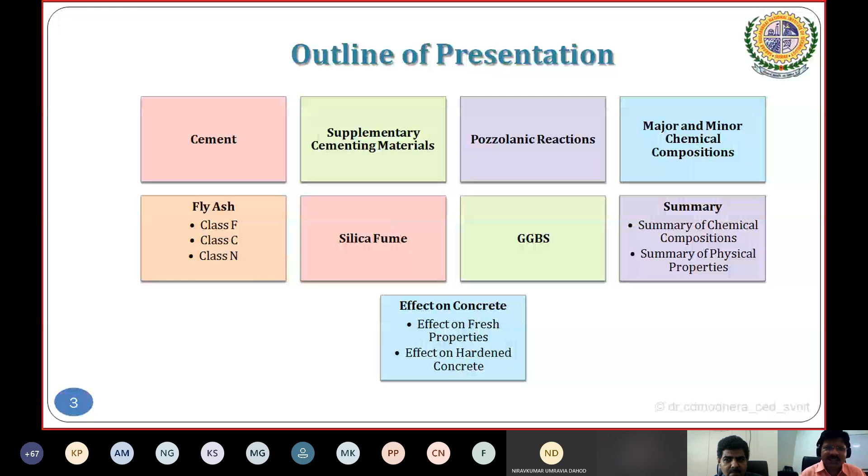I already spoke a few sentences about the outline of the presentation, so I will skip this slide. You can say the available oxides in cement, basically lime and silica.

Can you see this? You can interrupt sometime because I do not know why it is not coming. Now it is coming. Yes sir, okay, it is visible, thank you very much.

So you can say basic oxides in cement, because when we are talking about cementitious material, supplementary cementitious material, we should know the basic components of the cement itself. So I want to explain the chemicals involved in cement powder, mainly calcium oxide, SiO2, Al2O3, and so on.

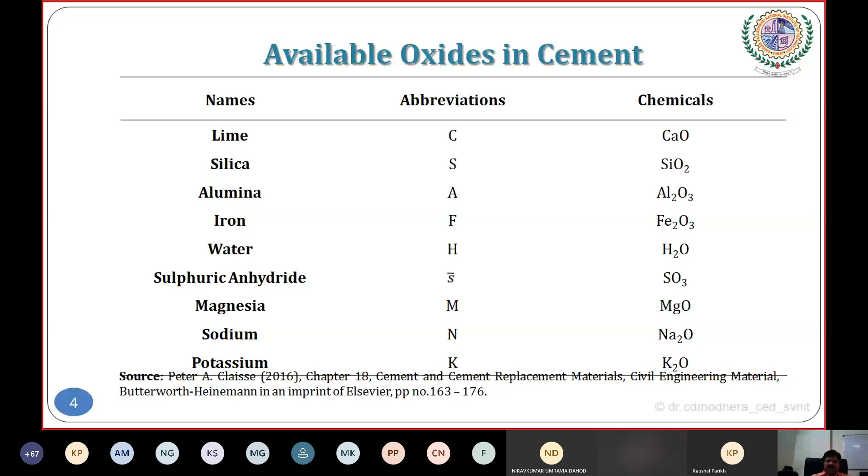Basically, cement compounds refer to four basic main compounds: tricalcium silicate, dicalcium silicate, tricalcium aluminate, and tetracalcium aluminoferrite. This is not hypothetical, it was seen, the range is defined, and sometimes for OPC it is 55, 16, 11, 9 respectively for the various compounds.

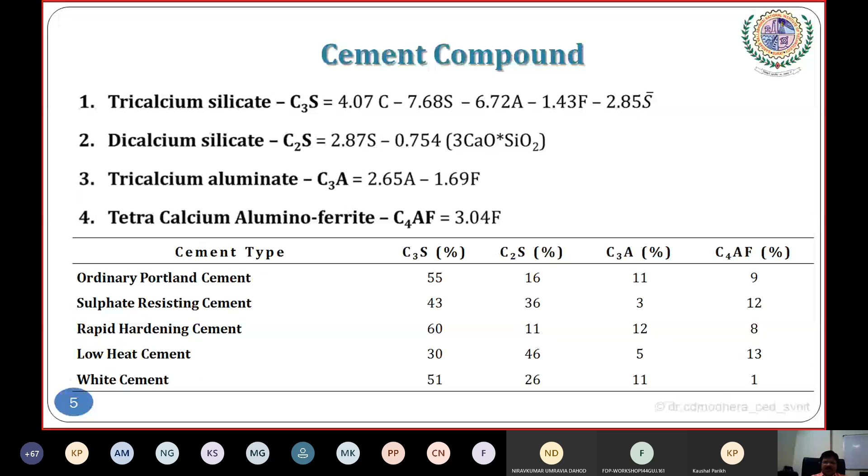Similarly, SRC cement is very important, as the seashore industry or maritime board usually refers to SRC cement for constructing jetty or similar structures. RHC means rapid hardening cement, also having respective compounds, low heat cement and white cement. As studied during BTech or MTech or in the field, many kinds of cement exist, but here I have written only 4 or 5, just to show what compounds exist.

Mainly, in short form: tricalcium silicate, dicalcium silicate, tricalcium aluminate, and tetracalcium aluminoferrite. These are, you can say, the time of 80% hydration when it will be completed, based on the literature itself.

What is written, Peter A. Claisse, as I already spoke last time, is taken from the American Concrete Institute and one of the textbooks at USA. So 10 days is required for completion of 80% hydration of the C3S component.

Similarly, C2S usually requires 100 days. So the second column indicates the number of days required to complete 80% hydration, and heat of hydration in joules per gram can be found out. C3S induces around 500, C2S around 250, and likewise. So this is just for the sake of information, heat of hydration and the hydration process are the main issues.

So what are each of the three or four components responsible for? We can say C3S is mainly responsible for early age strength. C2S is responsible for long-term strength, and C3A is just quick setting, nothing to do with hydration, but it sets, and then C3A reacts with sulfate resulting in sulfate attack on the concrete that causes it to deteriorate.

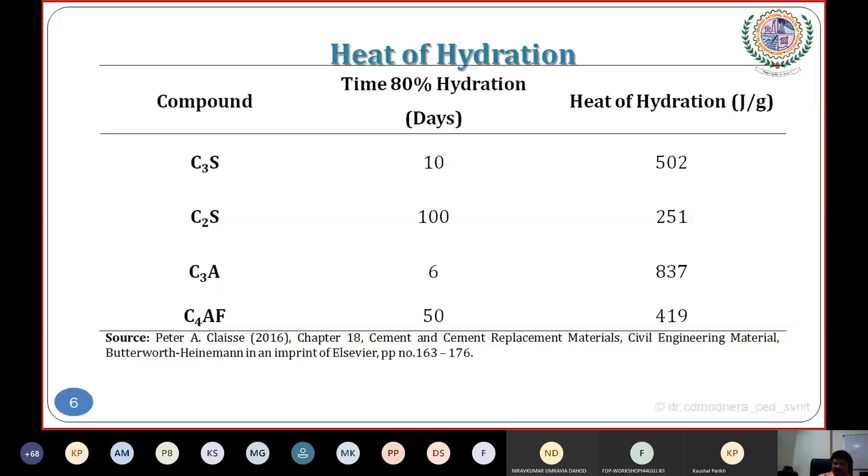In a broader sense, this diagram indicates condensed silica fume, PFA which is pulverized fly ash, GGBS, OPC, HAC. So I mean, how is it possible to replace cement with these?

That is the idea. Mainly natural pozzolana is very important, and I must emphasize, nowadays people are working with concrete and all doing their level best, but knowingly or unknowingly B.Tech students add something to concrete. We should think every time we are adding something to concrete and testing it. It is not scientifically correct, because when you are adding it and mixing it, hydration may or may not occur, and strength may or may not be there.

So basically, to add to cement, replacement may be 10%, 20%, 40%. You have to check the pozzolanic index first - that is the first test. I have seen many, even MTech and PhD thesis work, where I was involved in reviewing dissertations,

and they have blindly done so much work. They spend unnecessary money and time. So prior to that, you should check its pozzolanic index and then conduct a pilot test, and then you can choose the material having the right pozzolanic index. I will talk about that after some time.

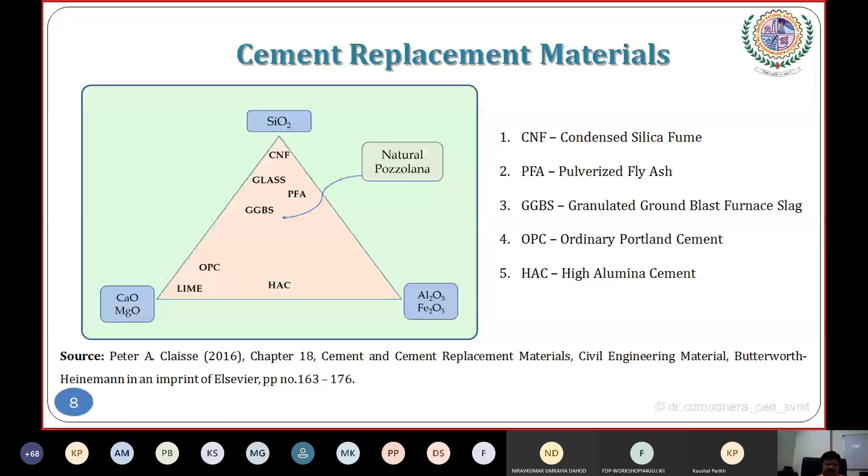Basically, supplementary cementing material is concerned. Pozzolana comes from Italy - the town name is Pozzuoli. Ancient Romans in 100 BC produced hydraulic binder by mixing hydrated lime with soil, and Horasan mortar - mixing lime with finely divided burnt clay - was extensively used by the Ottomans. This is just an introduction regarding this.

Nowadays, the word pozzolana covers a broad range of natural as well as artificial materials. The last one is very important - natural is okay, but every time we use natural materials, scarcity may arise in due course of time in the future. So that's why the second category, artificial material, is very, very important. One has to think that the material may be made specifically, or may come from waste, considered as a byproduct later on.

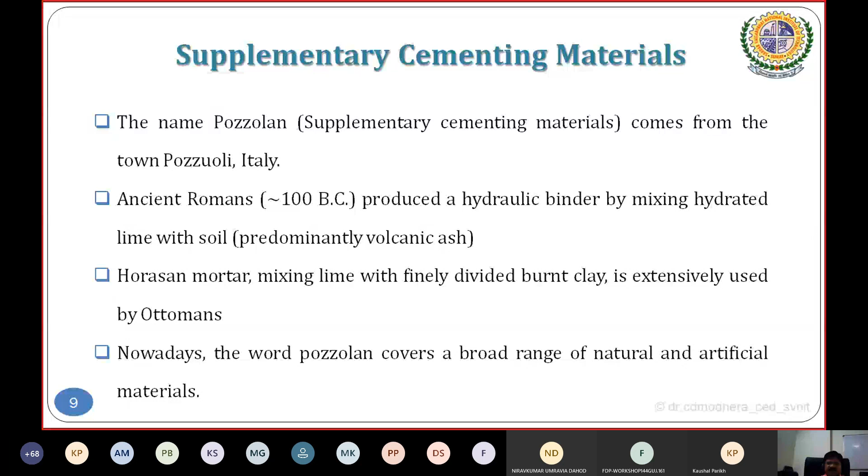So material that, when used in conjunction with Portland cement, contributes to the property of hardened concrete through hydraulic or pozzolanic activity or both - this is mainly natural and artificial. Now, what is artificial? That is the main emphasis - you can say fly ash, silica fume, GGBS, and so on.

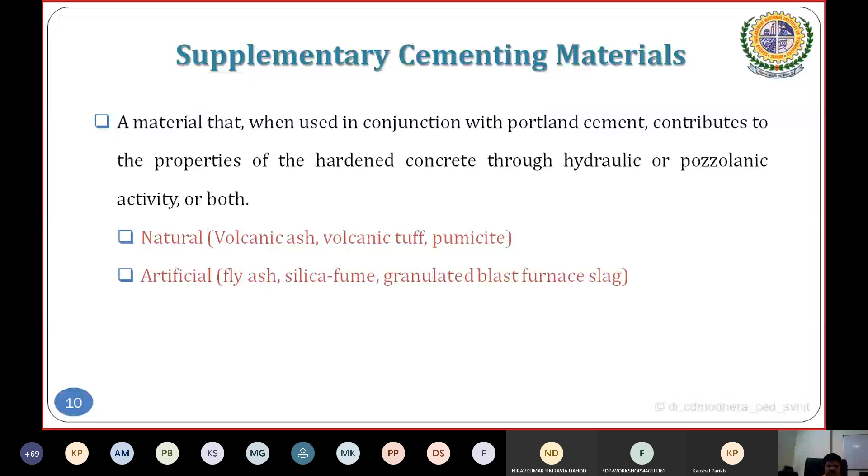And natural pozzolana includes volcanic ash, volcanic tuff, and pumicite. These things basically fall in the category of natural and artificial materials - siliceous or aluminous material which in itself possesses little or no cementitious value, but in finely divided form, in the presence of moisture, chemically reacts with calcium hydroxide to form compounds possessing hydraulic cementitious properties.

Supplementary cementing materials are often added to concrete to make the concrete mixture more economical. Mainly our target in India or everywhere - we have to think about economics also. And again, talk about durability - it should reduce permeability, increase strength, or influence other concrete properties. We would like to discuss the pozzolanic reaction.

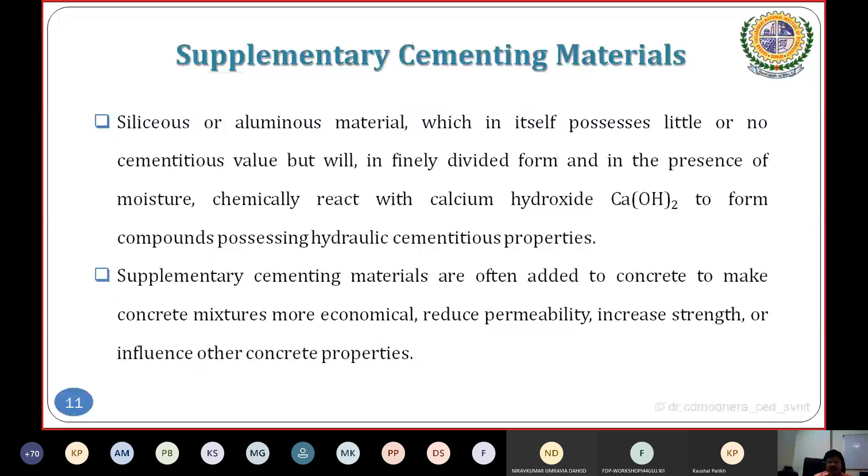Calcium hydroxide plus silica and water combine, and in short form you can call it CSH gel, or calcium silicate hydrates. This gel phenomenon is very important. CSH provides the hydraulic binding property, which is very well known.

Pozzolanic activity is the capacity of pozzolana to form alumina silicate with lime to form a cementitious product. How good, how effective the pozzolana is - we have to check that, and that is pozzolanic activity. What are the factors that affect the activity of pozzolana? Pozzolana reaction is between those components and water - SiO2 is one factor, Al2O3 is there, Fe2O3 is there, the degree of amorphousness of its structure, and the fineness of its particle - because everything is again governed by fineness.

Very fine material reacts very well, having good reaction or hydration process later on. So fine material always works well. However, its density one has to check.

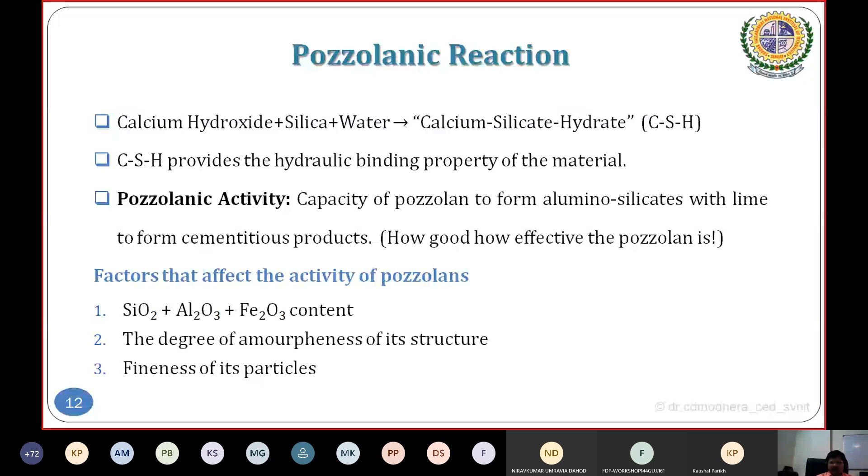The physical property of cement after adding or replacing cement by supplementary cementitious material, then pozzolanic reactivity should be verified. This IS code everybody should download and see. This procedure is mentioned well to check its pozzolanic reactivity or index. So 1727 is the IS code.

Further, at a glance, based on this code, following parameters should be checked: fineness by dry sieving, Blaine air permeability, specific gravity, standard consistency, initial and final setting time, and so on. This is required to check with confirmation of the IS code.

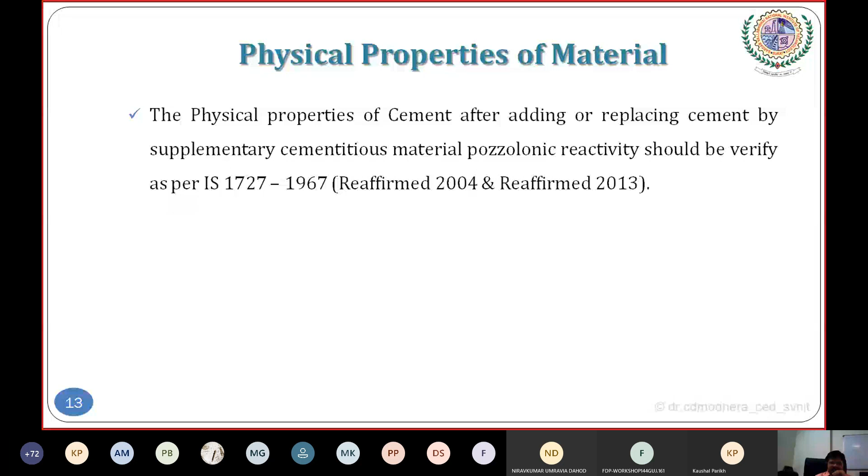As far as SCM is concerned, mainly higher compound or amount is silica as well as alumina, while lower amount is iron oxide, calcium oxide, and magnesium oxide. Some amount of alkalis is always present. This is just a standard thing.

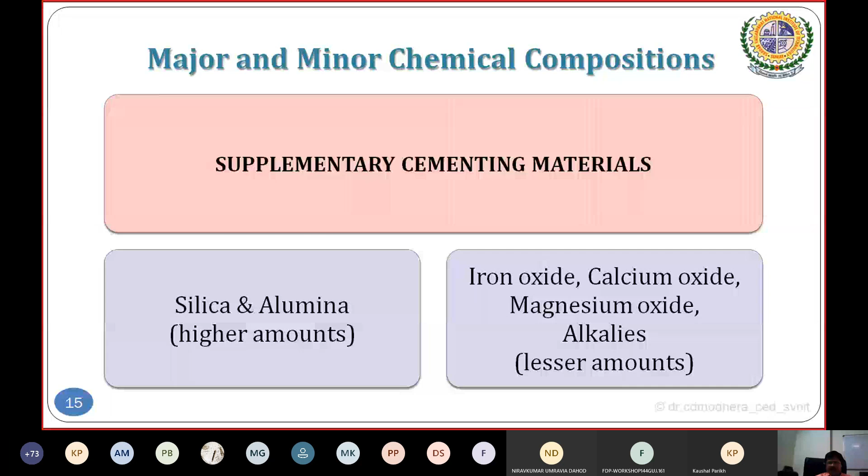Now come to one of the SCM materials, fly ash. Everybody knows it, but briefly, what is it? It's commonly used as a pozzolana in concrete. It's a byproduct of thermal power generation stations. Commercially available fly ash is finely divided residue that results from the combustion of pulverized coal, carried from the combustion chamber to the furnace by exhaust gases.

Let me interrupt. Can you hear me? Because I am alone here, and my voice is coming to you, dear participants. Can anyone react, or organizer, anyone respond? Can you hear me? Yes sir, yes, okay sir. Thank you very much, because here in this big room I am alone.

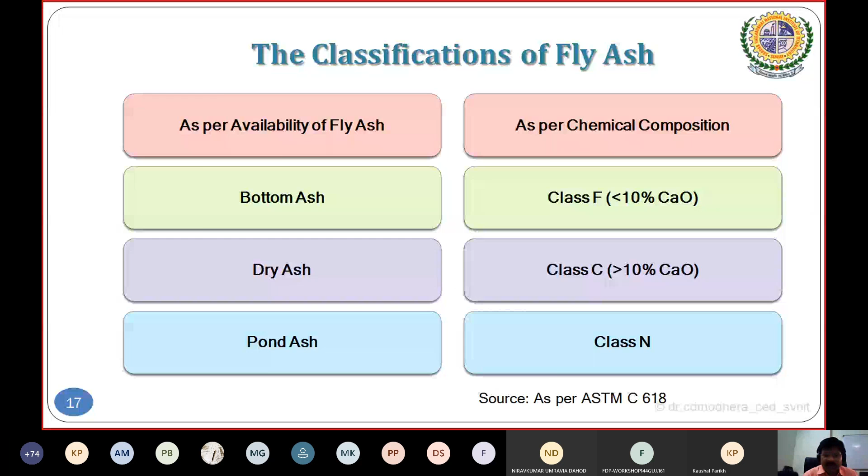Typical chemical composition of Indian fly ash: class C, class F, class N. The LOI is not more than 10%, and moisture content is more or less uniform, but there is little variation seen in class C between F and N. SO3 is more or less similar.

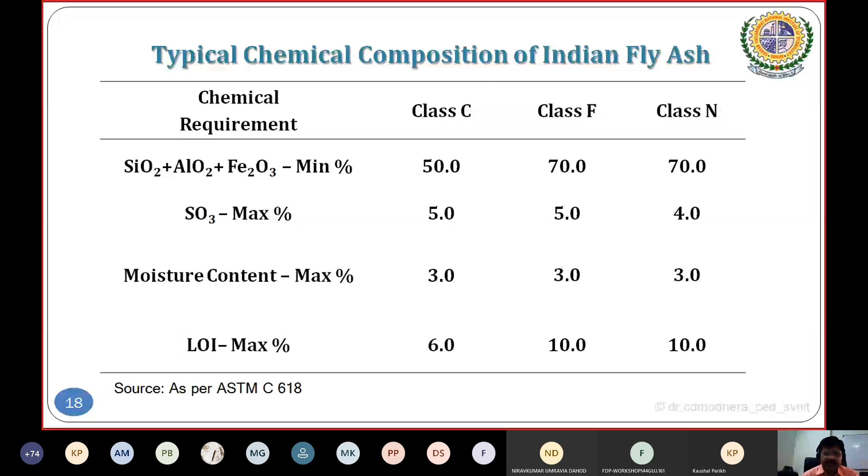Class C is discussed in detail. Fly ash normally produced from lignite or sub-bituminous coal is called class C fly ash. This class of fly ash has both pozzolanic and varying degree of self-cementing properties. Most class C fly ash contains more than 10% CaO. Basically C and F are defined with respect to percentage of CaO, calcium oxide.

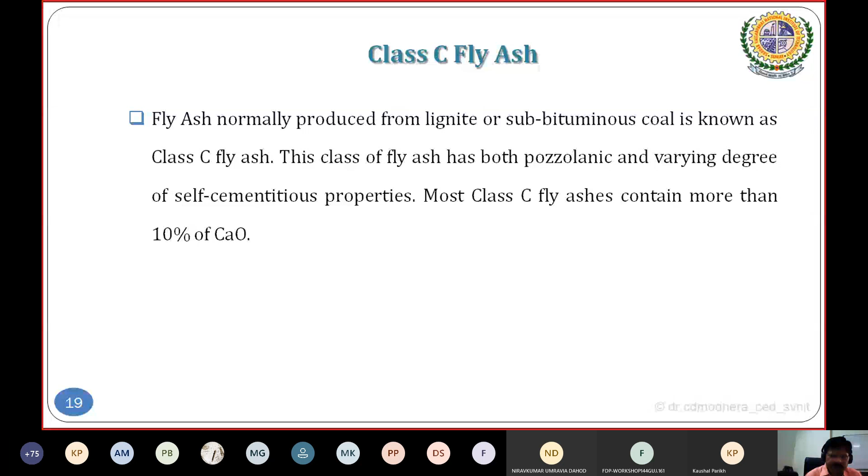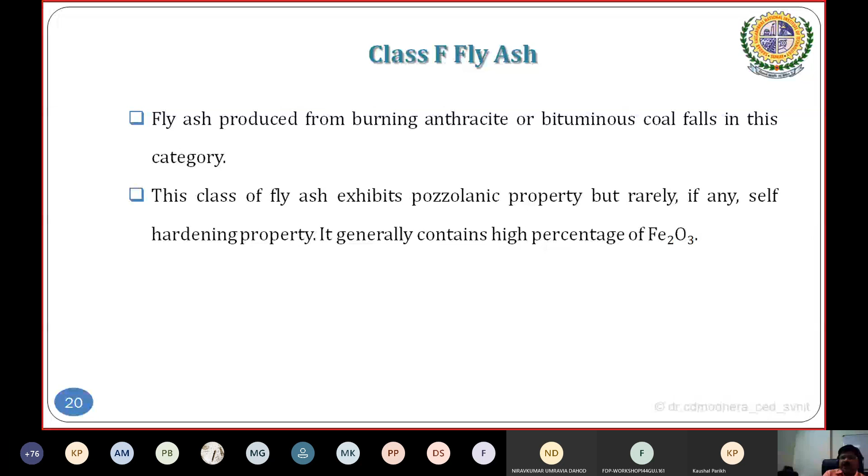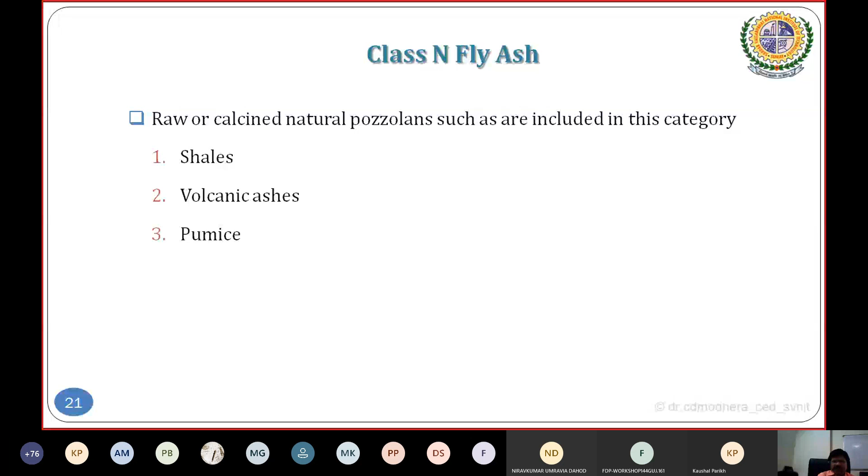Fly ash utilization, especially in concrete, has significant environmental benefits, including increasing the life of concrete structures and roads, and improving durability. Net reduction in energy - nowadays people talk about sustainability, greenhouse effect, green concrete. This is one material that is very helpful in this aspect. Other adverse effects: some air emission when fly ash is used to replace manufactured cement, but there's reduction in amount of coal combustion, product that must be disposed in landfill is reduced, and conservation of other natural resources and materials. So this is just environmental benefit.

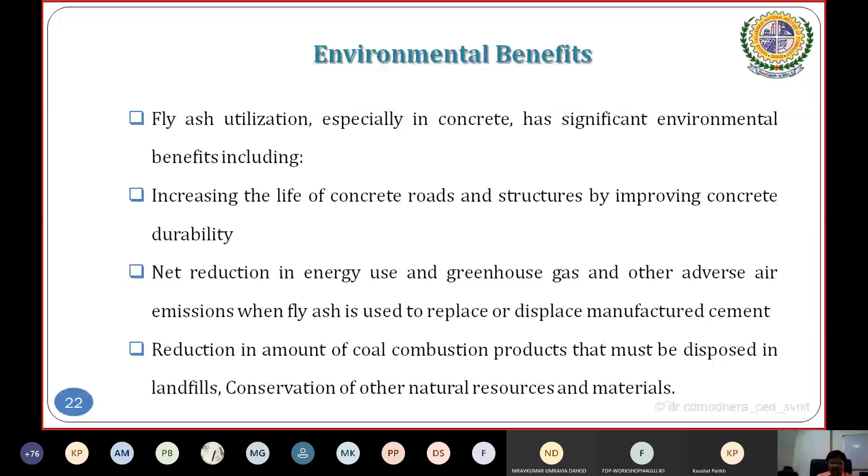Benefit of using fly ash in concrete - there are more than 10 listed. It requires less water demand, improved workability, improved pumpability, lower concrete cost because it is lower cost than cement, and higher ultimate strength because at later stage it will get good strength.

People have also attempted to use high volume fly ash concrete, meaning the proportion of fly ash is increased. They prepare the concrete by trial and mix to arrive at the final mix. The concrete with high volume fly ash should not compromise strength, workability, or the hardening process.

Because if you are adding fly ash blindly based on experience, next day you can't open or demold your specimen - it may take 3-4 days. This happens when working with high volume fly ash, but you can overcome that issue by adding a restrictive chemical admixture to minimize the problem.

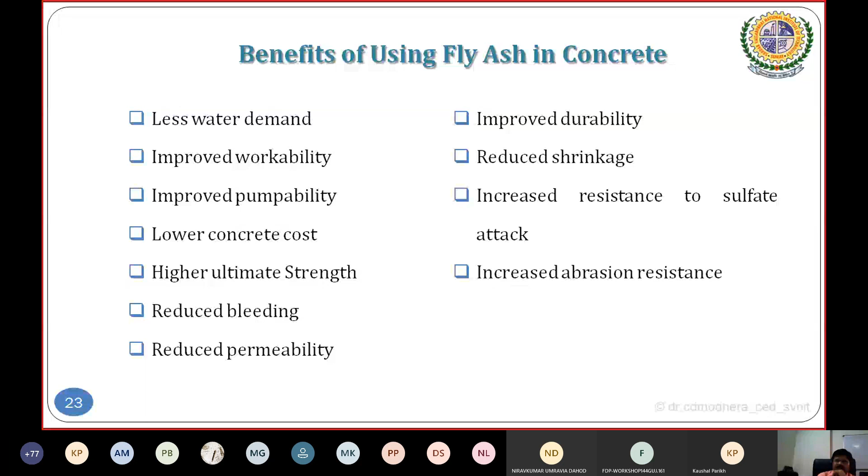As far as cement is concerned, you can see the cement quantity is lesser than fly ash, since fly ash content is higher. The quantity is 370, water is 120 kg per meter cube. This is just a glance at one mixture proportion, exploring to the audience that air entraining admixture was very much required, and superplasticizer also.

Remember, this is the era where we have to use chemical admixtures frequently - I am giving this example. So using these, you can say plenty, but for that mindset also has to be changed. Earlier people are now becoming quality conscious and using chemical admixtures and fiber frequently, but still mindset has to change to use them frequently.

Just for information, I'll give one example: long back when I was 20 or 25 years old, when any foreigner came and kept a water bottle in hand, we were observing and sometimes laughing - we did not know. Our mindset was not to use those kind of things.

But now everybody prefers to use water bottles and keep them handy. Mindset has changed. Similarly, in the construction industry, the mindset has to change to frequently use superplasticizer or chemical admixture, fiber and so on. Then the performance of the concrete will be at par with what we desire.

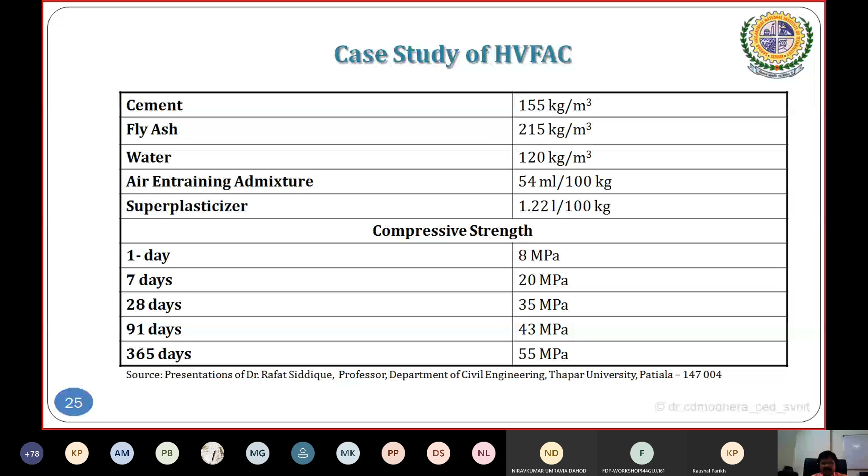You can see this example showing 14 days results, 91 days results, with tensile strength also there, young modulus of elasticity also there, and so on. I think this is the value - we cannot discuss much, but the importance is always there.

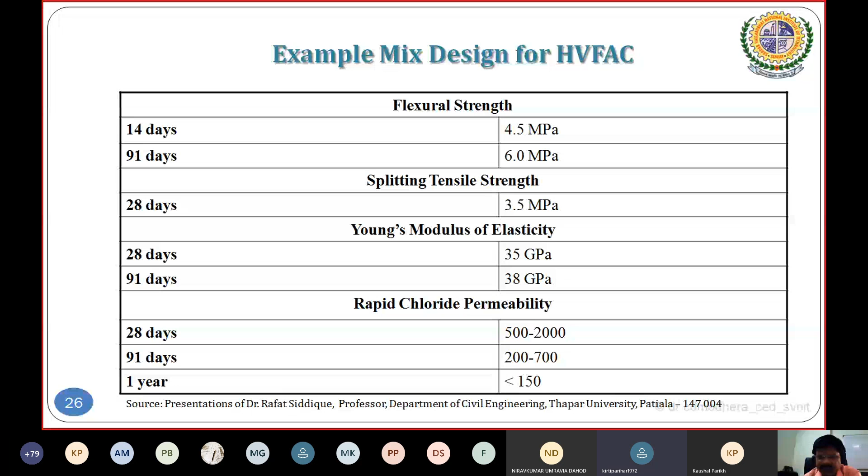It has been shown as strength versus age of concrete, and you can see at 365 days strength for M1 mix, M2 mix, M3 mix, M4 mix. There are four categories of mix - 0% means it is called the control concrete, M2 means 40%, then 45%, 50%. This is one study carried out by one of the research scholars.

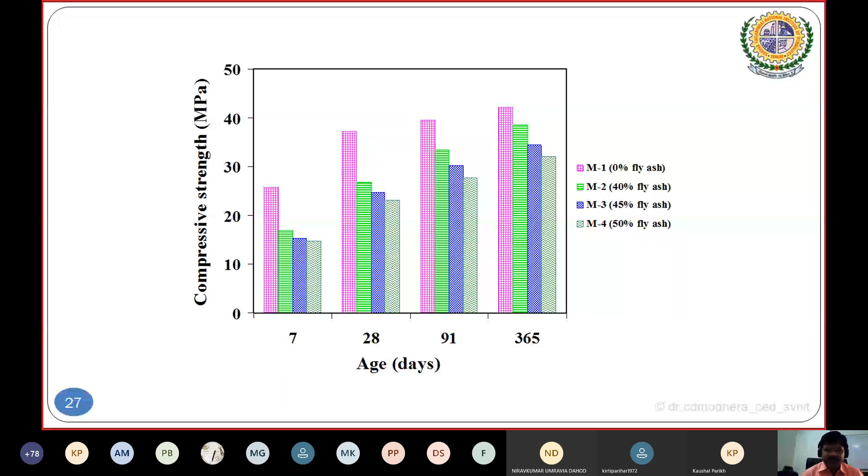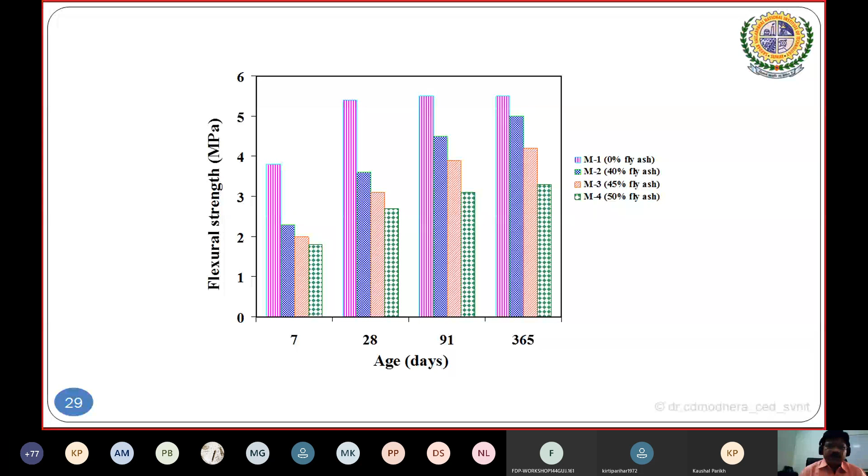Somebody called me, it's not correct. Hello? Actually I received a complaint that you are not getting my voice totally - let me know if there is a problem, let me know organizer. Your voice is perfect, perfectly okay, we got your voice, but can you see the PPT? Yeah sir, perfectly, PPT is perfectly okay sir. Okay, then the problem may be at their respective place only. Anyway, thank you.

This is one of the graphs shown - that concrete was also tested for abrasion, because our high volume fly ash concrete is mainly preferred for preparing rigid pavement. For pavement, it has to be checked - compressive strength is not that predominant, but flexural strength is important when pavement is concerned, as well as wear and tear that has taken place.

Depth of wear has been conducted as per IS 1237 code, just like the tile code we considered, and it was tested for how much wear took place after applying the bylaws of IS 1237. Here there are four mixes: 0%, 40%, 45%, and 50%.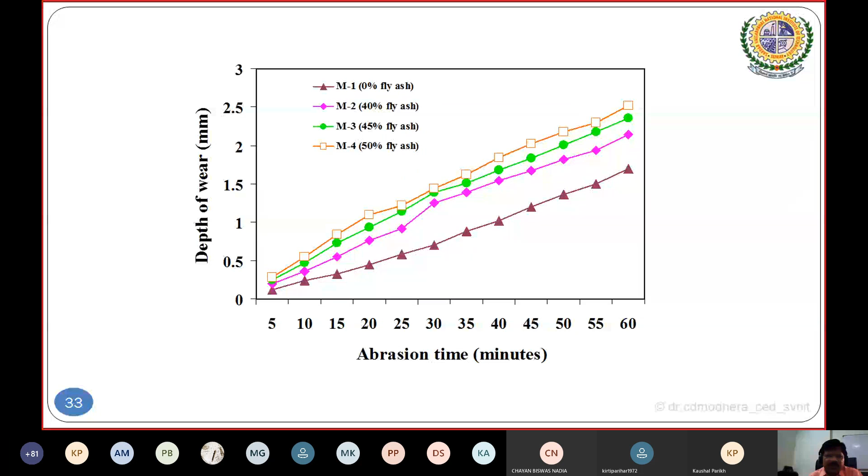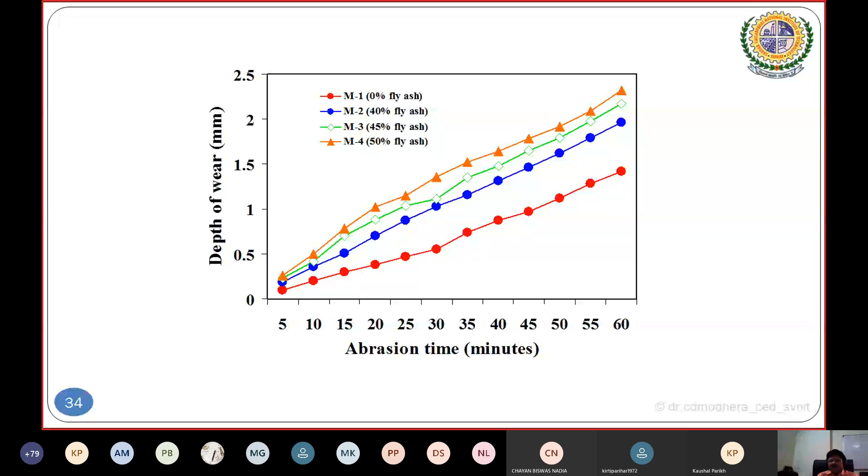So in short, I can say fly ash will have C, F, N kind of types. It depends on availability, it depends on its own chemical composition, and then you choose which one. You are interested in N only, but it is not available.

Then if F is available very near, we have to choose that one only and think about planning. Accordingly, your code may permit say 30%, 40%, but if you are not having very good fly ash quality yet it is available in plenty, then choose it and decrease that maximum limit. You can work with 10%, 20%, so you don't compromise with the strength. That is the thing available with fly ash.

Fly ash again increases the workability and reduces the water demand. Some advantages have been mentioned. Now come to the next, that is silica fume.

Silica fume is also one of the products which is very fine non-crystalline silica produced in an electric arc furnace, at a temperature of around 2000 centigrade, as a byproduct of the production of elemental silicon or alloys containing silicon, also known as condensed silica fume, or sometimes we know it as microsilica. Now here also this same statement has been taken from ACI 116R.

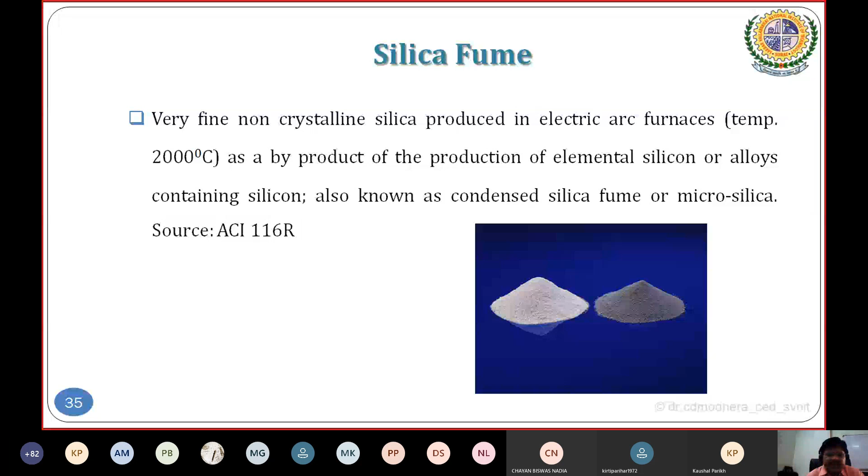It is the American Concrete Institute 116 capital R report. Silica fume's physical properties at a glance: its particle size is always lesser than 1 micron, and bulk density also varies by type of production. If it is produced as is, that time it may give 130 to 430. If slurry is there, because of that it has a little more weight, so 1320 to 1440 kg per meter cube. And if densified, then in that case it is 480 to 720 kg per meter cube. You can look at the first and third ones, which are lower than the weight of water.

So specific gravity of silica fume is around 2.2. Surface area, not Blaine area, but other technique, you can say it is coming around 13,000 to 30,000 meter square per kg. Now think about the surface area of cement, which is coming around 3250 centimeter square per gram or so. So think that it is having very, very small particles, that's why reaction by default will take place.

However, if we emphasize its chemical composition in detail, then SiO2 is about 96%, Al2O3 only 0.8%, and the remaining is given.

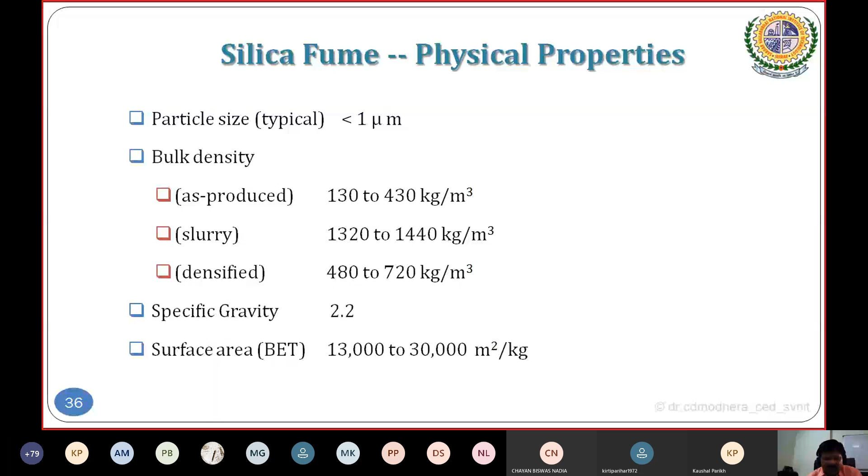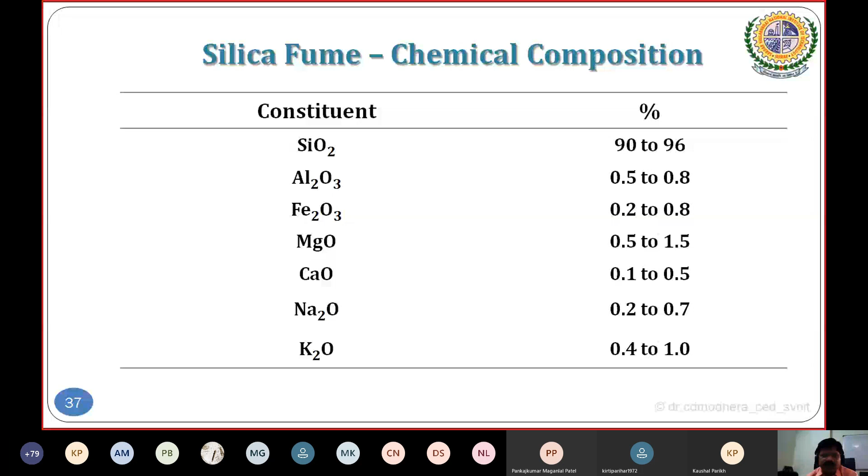So I think only silicon oxide is maximum because of silica, and that's why we are calling it silica, microsilica or silica fume. You can look at and visualize this through the SEM picture of the silica fume, at 100x and 1000x magnification. You can see through this picture how it has the binding property and its structures.

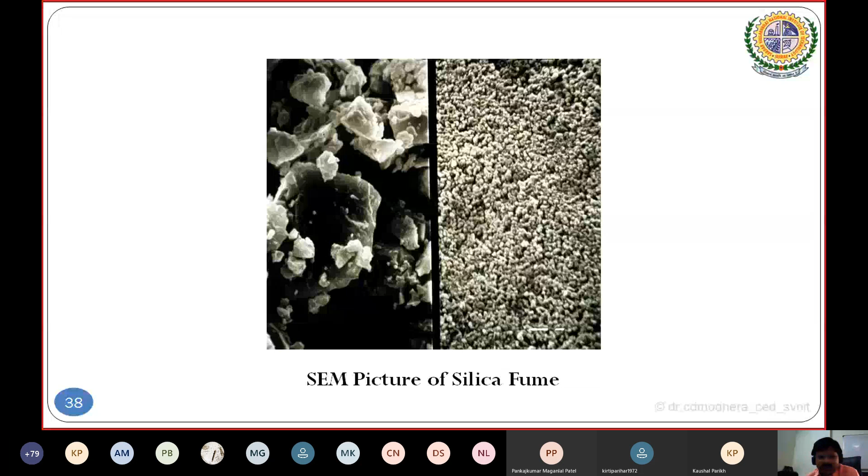Because we are having a lot of argument and problem when pouring more cement content to get good strength, but at the same time, during manufacture of cement, there is CO2 emission, which is again a problem. People are working on how to reduce CO2 emission. Global warming is also there, and people are working on sustainability, on how to maintain CO2 emission minimum or reduce its effect. If we are using silica fume, fly ash and GGBS, then to a certain extent we can reduce the use of cement content. Remember this.

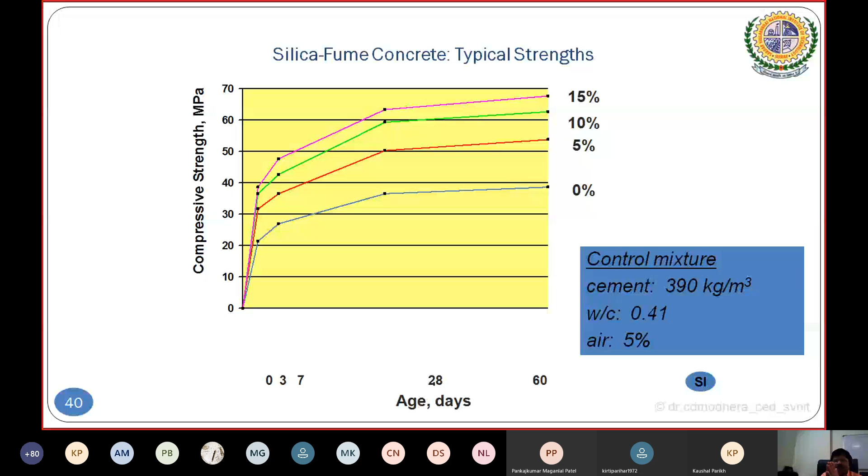Now come to silica fume concrete. Here also typical values are selected: 0% replacement, then 5, 10, and 15%. Compressive strength has been shown on the y-axis, and on the x-axis, 0 days, 3 days, 7 days, 28 days, and 60 days. Maximum, you can say, the 2 months strength is given.

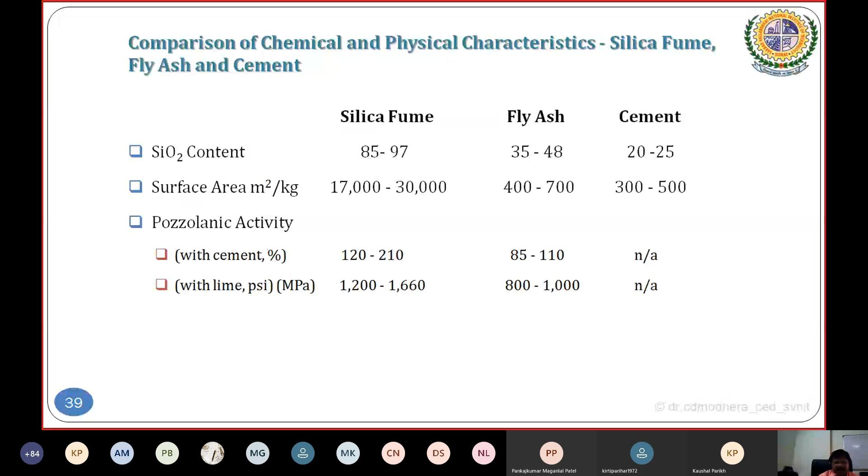Another thing is GGBS - ground granulated blast furnace slag - which is a granular material formed when molten iron blast furnace slag is rapidly chilled or quenched by immersion in water. It is a granular product with very limited crystal formation, is highly cementitious in nature, and is ground to cement fineness and hydrates like Portland cement.

So these two sentences indicate it is also specifically considered a critical industrial waste, but its production as GGBS is as per our requirement. So you can see it is a granular product with very limited crystal formation, is highly cementitious in nature, and ground to cement fineness, hydrating like Portland cement.

So it is near to cement behavior. Ground granulated blast furnace slag (GGBS) is a cementitious material and can be substituted for cement on, you can say, a 1:1 basis. It means that GGBS one and cement one can be substituted.

Substitution of ground granulated blast furnace slag should be limited to 50% for areas not exposed to deicing salt, and to 25% for concrete which will be exposed to deicing salt. So this is again related to GGBS.

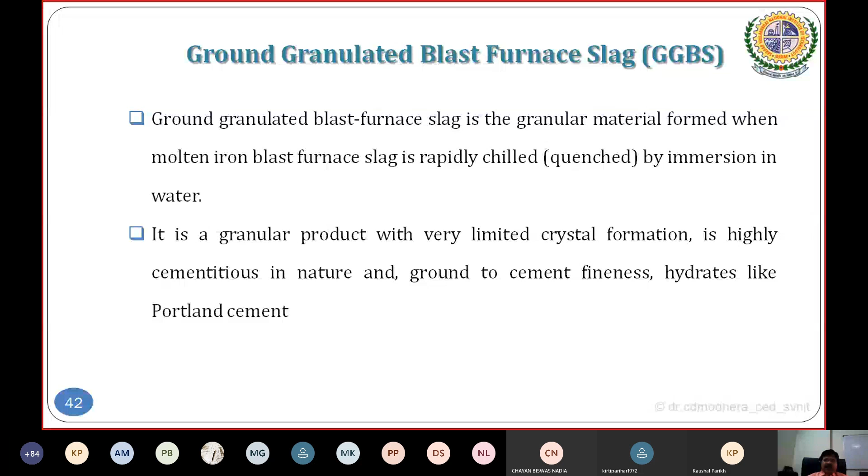Use of GGBS - why are we using it? Why has it been preferred for so long? It basically came from foreign countries, and now we are followers. But still it continues to be used because it gives better workability, making placing and compaction easier. That is one of the standard advantages of its use.

It lowers early age temperature rise, because rising temperature is also important. If temperature rises suddenly, shrinkage cracking becomes a problem. So reducing the risk of thermal cracking is why it's used in large quantities, that is, in mass concreting. When GGBS is used at that time, it is sure to minimize and lessen the chances of induced cracking due to thermal effects.

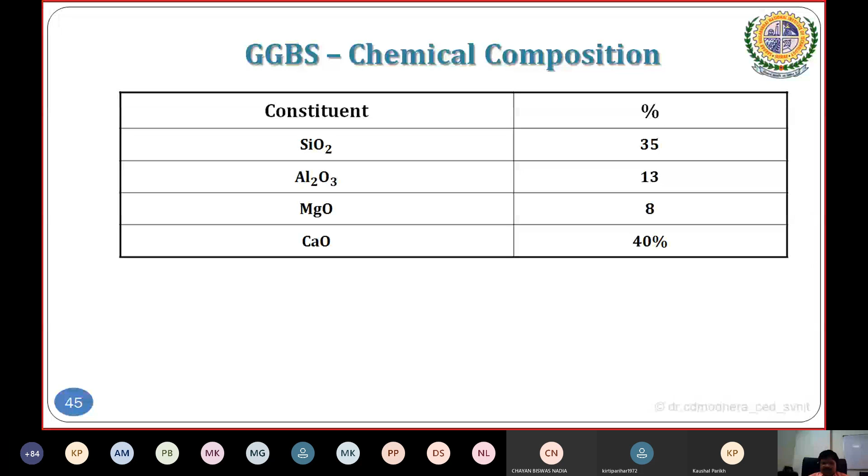Elimination of the risk of damaging internal reaction - this is also one aspect, ASR. It is standard; many PhDs have been done on alkali-silica reaction with the help of chemistry experts, and it is a very sophisticated phenomenon people observe. It's called alkali-silica reaction because alkali is present and silica is also present, and they react over time. People have worked out indexes, and based on those indexes you can decide whether a GGBS source is good or not - that's how its quality can be decided.

High resistance to chloride ingress, reducing the risk of reinforcement corrosion. This means high resistance is available against attack, even from sulfate and other chemicals. So this is broadly why we are using GGBS.

I think for GGBS there is no literature study - it's only related to the chemical composition given, and in fact some modulus of elasticity graphs seem to be absent. Extremely sorry, it was available, but we are not finding it.

Metakaolin is another property, and this is different from other SCMs like fly ash, silica fume, and slag, in that it is not a byproduct. Earlier, GGBS to a certain extent can be said to be a byproduct, and fly ash is also a byproduct, and so on.

Similarly with metakaolin - the SCM metakaolin is produced by heating kaolin. Kaolin is one of the most abundant natural clay minerals. So it is basically a clay, kaolin. It is burnt at temperatures of 650 to 900 degrees, and this heat treatment, or calcination, serves to break down the structure of kaolin. This much temperature is required to apply to the natural material, and then it produces a powder, which is usually what we call metakaolin.

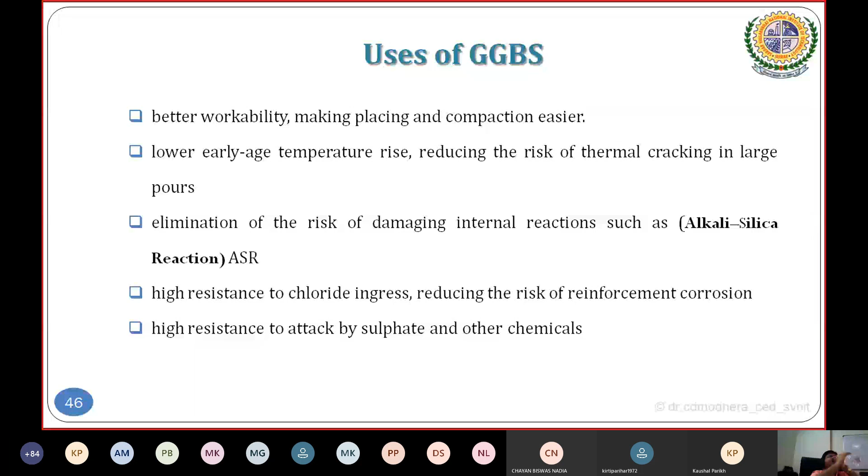Another, just a bound hydroxyl ion is removed, resulting in disorder among alumina and silica. They are a highly reactive amorphous material with pozzolanic and latent hydraulic reactivity, suitable for use in cementing material.

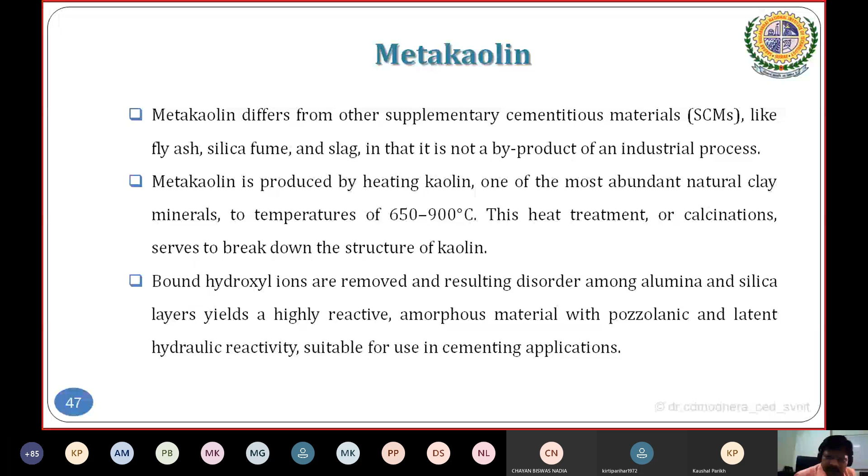Now if we look at its size or physical properties, the size is more or less 1 to 2 micrometers or microns, and particle shape is kind of plate or platy. Specific gravity is concerned, it is lower, around 2.4 only. Specific surface area is different here, around 15,000 square meters per gram.

As for chemical composition, it includes SiO2, calcium oxide, Al2O3, Fe2O3, and so on. So what does this indicate? Here also the maximum component is silicon oxide as well as Al2O3. It is around, the first one is 50 to 55 percent, and Al2O3 is 40 to 45%.

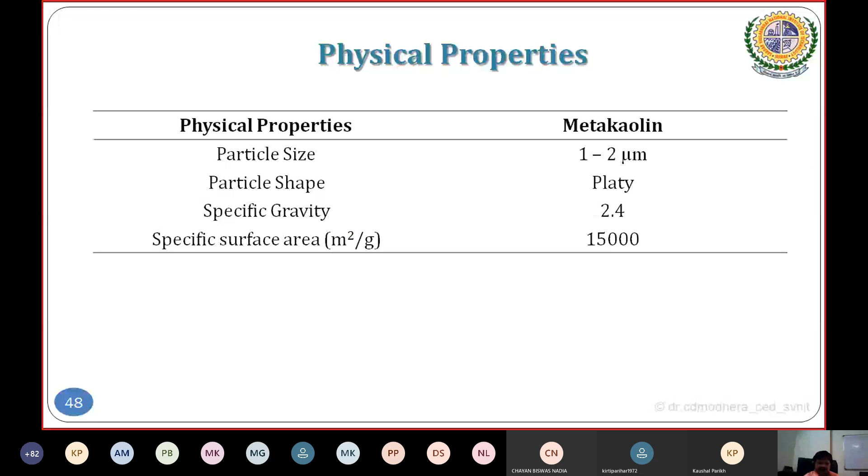This is some of the comments. Because with 10%, you can always go for more than that, but there is a study showing that if you use more than that, you don't get its benefit. So here the statement is: 10% metakaolin as a replacement of cement is more beneficial than a higher dosage for improving the corrosion resistance of reinforcement.

That is one point. Metakaolin delays the initial corrosion cracking, it is very good at that, and this is attributed to improved permeability. The characteristics of concrete with metakaolin have their own characteristics, so it is mainly used at about 10%. The corrosion resistance property of this mineral admixture in concrete showed good agreement.

Sugarcane or bagasse is again one of the other materials. This is mainly, I think, in Maharashtra, particularly the Shirdi and Loni area, Ahmednagar. So in our region, sugarcane is one of the agricultural products, and when you use it, there is remaining residue.

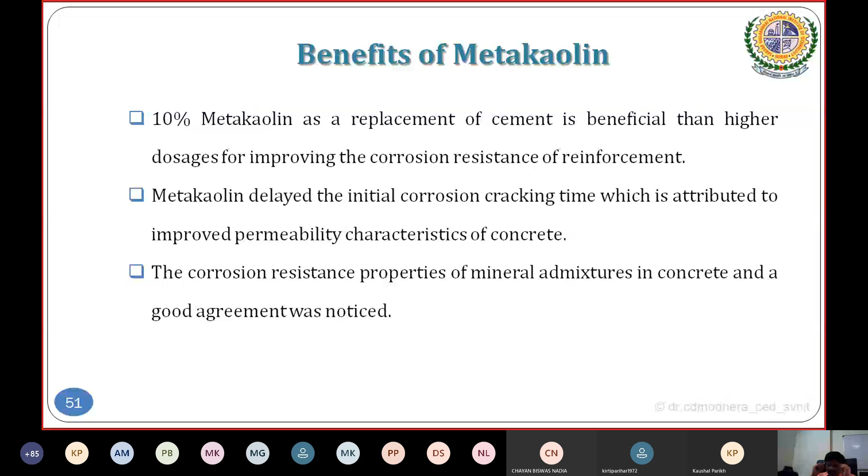The potential for application of any supplementary cementing material depends on its availability. For example, if you're talking about rice husk ash but rice is not produced locally and you're bringing it from West Bengal, then there isn't that much benefit. But in our region where such waste is available in maximum quantity, then you can think of research for that only. So it depends on availability of such material.

Its pozzolanic characteristic is very important. Use this percentage and, using IS 1727 test for the pozzolanic index, if found okay, you can decide this much percentage is more than sufficient. Otherwise, basically using more and more waste is definitely beneficial because we are reducing use of cement, but we must not compromise with the strength and durability as well. So that's why you have to think how to utilize it.

It is kind of like, in the Gujarat region, when preparing any sweet, mainly halwa or similar, the taste comes from adding all ingredients properly. If you add maximum ghee, that is also not good; minimum is also not good. So mix design and utilizing with SCM involves so many trials and errors, but you shouldn't blindly conduct trial and error. I am repeating this again.

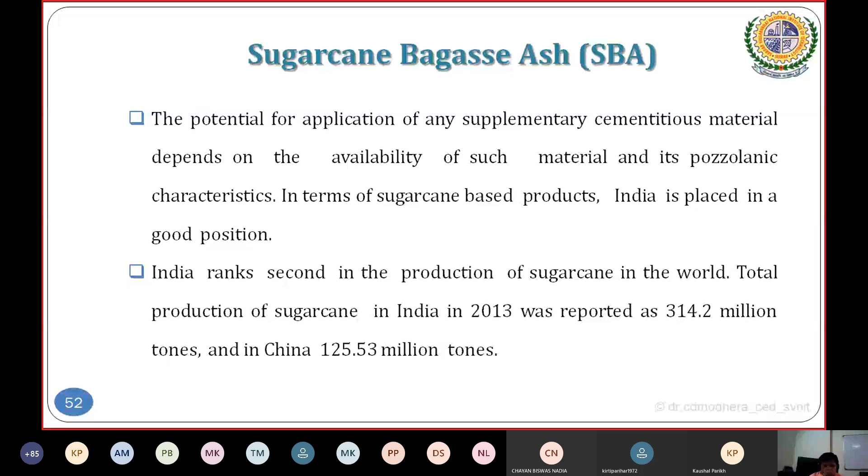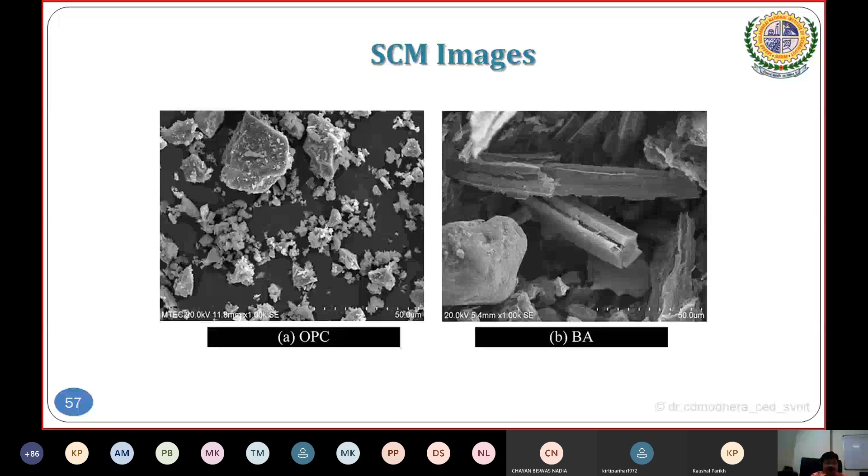Why are we using this? One reason is certainly that we are using a secondary material. But if we use this, it definitely improves the mechanical property and durability, higher strength also people have shown, and it is giving results. But let me tell you, only using this with simple replacement of cement will not work.

Some parameters, maybe what is called workability, may go down. Some air will be there, voids will be there, then it will result in loss of strength. So at that time you have to use an air entraining agent, or otherwise you have to use, at the same time, a very good plasticizer and super plasticizer.

But here its property is there. So in general we can say with higher strength, if we have used those things, it decreases porosity to achieve durable as well as sustainable concrete, and can tackle the disposal problem significantly.

This rice husk, RHA short form, the rice milling industry generates a lot of rice husk during milling of paddy which comes from the field. This rice husk is mostly used as fuel in the boiler, as a fuel for processing the paddy. And rice husk is also used as fuel for power generation.

Now that generation process also again creates ash. Rice husk ash is around 25% by weight of the rice husk when burned in the boiler, and it is estimated that about 70 million tons of RHA is produced annually worldwide. This is important because to dispose of this material we do not have land, and we cannot throw it into any sea or anywhere. So that's why one has to see how it can be utilized.

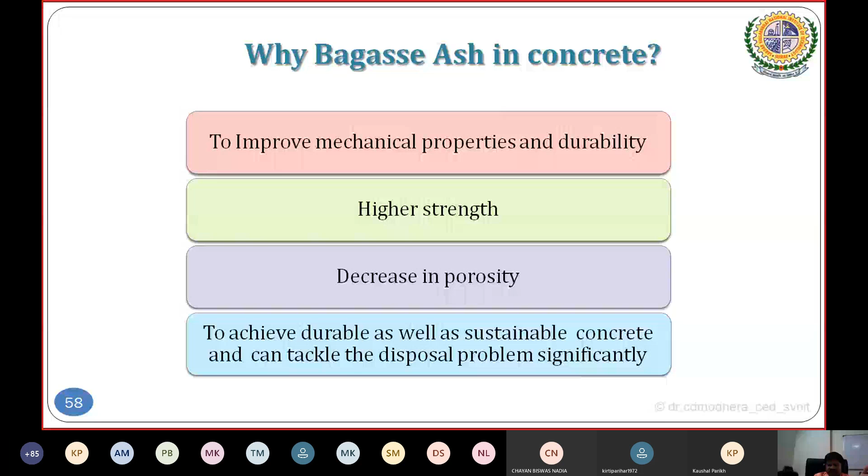For your kind info, people have made aggregate from that, not rice husk ash specifically but from fly ash as a cementing material, and then produced aggregate kind of thing, which you can then replace with natural aggregate at a certain extent or percentage.

This RHA is a greater environmental threat, causing damage to the land and surrounding area in which it is dumped. During milling of paddy, about 78% of weight is received as rice, broken rice and bran. This we already know, 78%.

The RHA in turn contains around 85 to 90% amorphous silica. For every 1000 kg of paddy milled, about 220 kg, that's 22%, as rightly said earlier. And when this husk is burned in the boiler, about 55 kg is produced, now reduced to that amount, and RHA will be generated. This is a simple calculation.

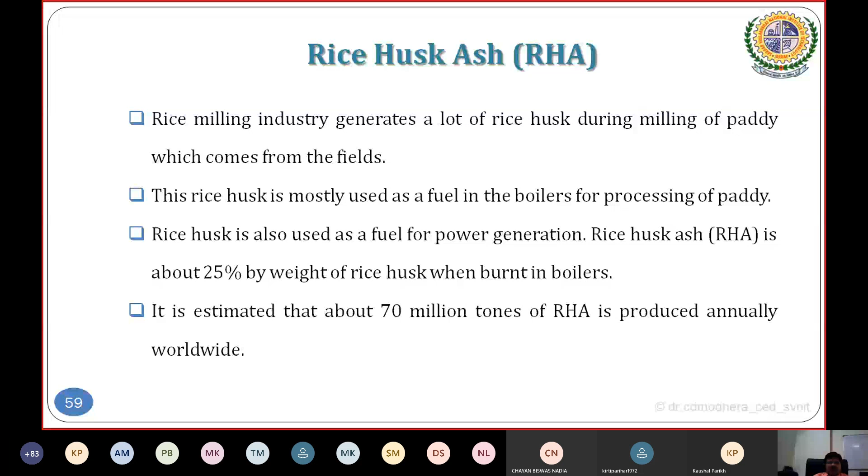Here consider waste glass: instead of waste glass ending up in the landfill, it becomes used as a replacement for cement, and it can't be dissolved by natural or normal recycling ways. So most of the recovered waste glass is used by glass manufacturing companies in production of new glass, in the recycle bottle process.

Here we are talking about recycled glass powder, but I am emphasizing recycled coarse aggregate. It is not a cementitious material, but I am talking about it as a filler material. Whenever any mix design is done, about 80% part will be from aggregate. So a huge amount of aggregate is required if we are constructing any structure - 80% part - and we also have to think about preserving the forest. The remaining 20% is from cement.

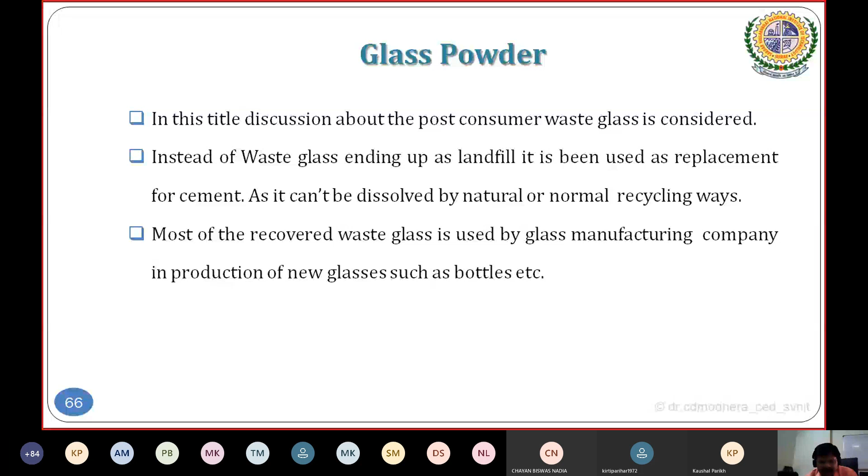Here one typical glass powder content concrete mix is given - it was just like M20 only, 330 kg per meter cube cement, sand is 770 kg per meter cube, aggregate is 1190, water-cement ratio is 0.52. WGP indicates waste glass powder. When using secondary materials, you don't get that much benefit, but we tried 10%, 15%, and 20%. Here 20 I was sure of, so 20 is there - earlier 30 was mentioned, it must be a printing mistake.

So 20% WGP means this glass powder, and WGP 0 means the control sample, which is 33 or 32, near to that - this is the average of 3 or so many trials conducted. This is one typical bar chart form I wanted to show, where the y-axis shows compressive strength in MPa, and these results indicate the case for those weeks and at 28 days.

Average of the cube density is also mentioned, not much variation. Of course, on the bar chart there will be a big scale point of view. You can say 2351 showing very large, 2187, but slightly lightweight is definitely coming.

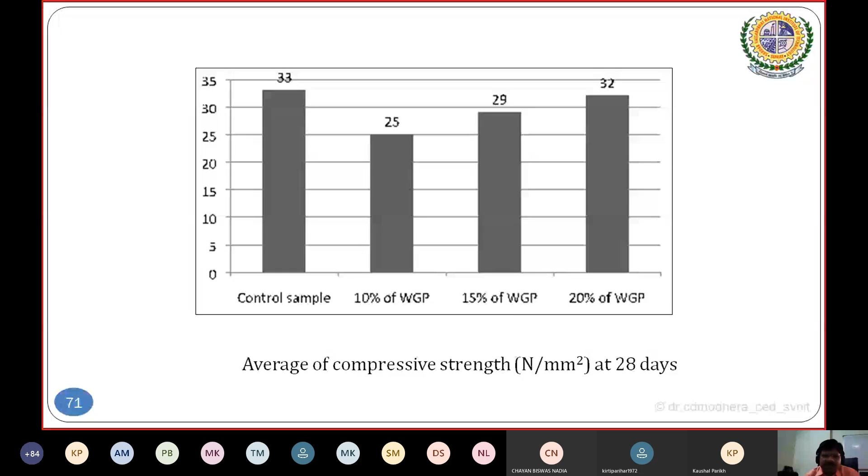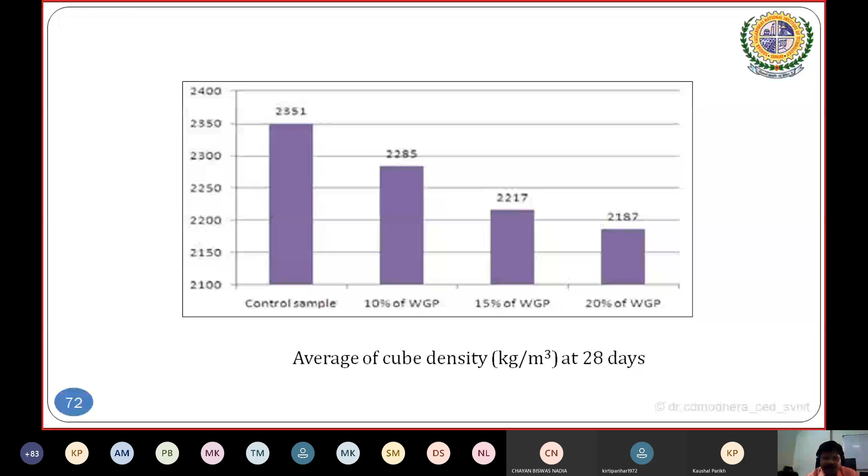That's why, as a concrete technologist working with concrete, we are not sure. You must agree that no program will simply take input and give you the proportion. People have tried this, even applying the ANN technique, artificial neural network. But it is still valid only for that case, because the only drawback is that when preparing or manufacturing the concrete mix, so many factors are involved, not just one or three or four factors.

Number of factors, mainly because the ingredients are not clear. It is a teamwork, concrete is a heterogeneous material. So coarse aggregate behavior, fine aggregate behavior, cement type, how you are placing it, how much you mix it, how much time is taken from pouring the concrete, how much vibration is given, demolding time, and after demolding whether curing is properly done or not. So many factors are there, but they can be taken care of.

Now we are working with this, either online, but people have to work on it, and in this area much work has been done, but the thing is it is scattered. It is valid for his or her case, or for that particular region only. But still, those who are involved continue the work.

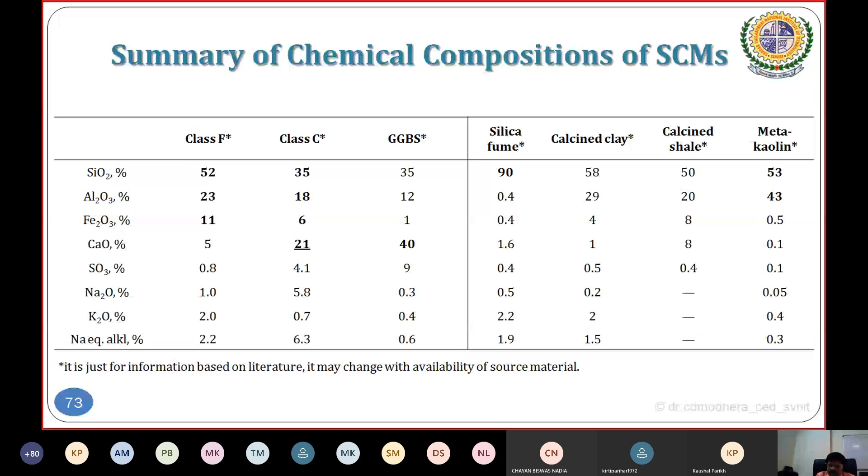Otherwise, even putting a good specification will not survive. Nowadays, repairing work is kind of a lucrative job, and if you are doing it in a scientific way, then I think it is better.

And another thing from my experience, people are not using chemical admixture properly, simply keeping the vessel. When we take a visit, they only show that vessel, which has been lying since long. So I think ethics also play a key role in the case of repairing or utilizing any admixture, this is what my experience tells.

So why is range required? Because when comparing, only one number is more or less fixed, but it is affected by so many factors. I already told you - same cement content, same proportion, but you are manufacturing at Baroda and another person manufacturing at Surat. Region is different, agency is different, but the way they have prepared it will react on compressive strength or its performance. So that's why range is a very good thing. The minimum is this, maximum is this, and in between - this is the range.

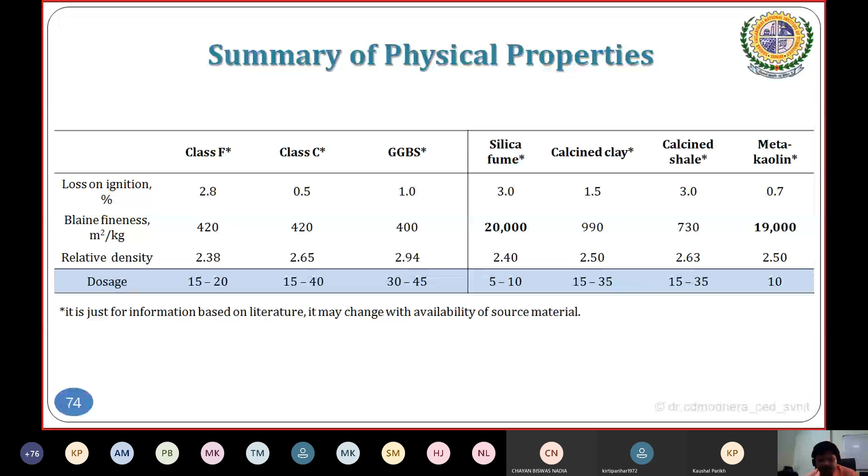Bleeding and segregation - sometimes we are not bothered about this, but it is equally important toward hardening, because when bleeding or segregation takes place, cement paste will not be available as it was supposed to be, and the hydration process will be affected. The C-S-H gel phenomena will not perform or produce well, and finally porosity and voids will be induced, resulting in impact on compressive strength or overall performance of the structure. I have seen many cases of segregation or honeycombing after removing the shuttering, so people make patching to level it, but later that part becomes an access air path, salty air path, and becomes part of the corrosion - and after a few years, once corrosion starts, it will go on.

Hello. Sir, I request you to check your voice, please. I kindly request you to check, please, your voice - your voice is not coming right now. Okay, they left and rejoined, so wait for the participants - they will rejoin once again. May have some net issues. We will wait for 5 minutes so that you rejoin.

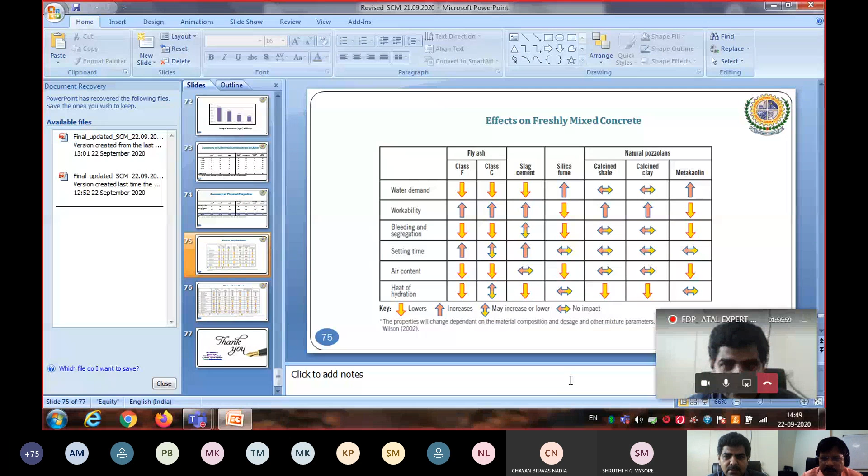Fine, it was, sir, here. Now can you see slide number 75 clearly? Yes, visible, sir. So anyway, this is a little hurdle - all of a sudden there was a problem from the internet only. In this case, you can say the laptop was okay.

Here we were talking about different parameters: water demand, workability, bleeding, setting time also. So air content is also important, and heat of hydration.

Concrete technology is a vast subject, basically. It depends on what you are talking about, and what your concrete is going to be used for. Many factors are involved. And finally, cost. Once you are stuck with cost, performance may be hampered. So something should be compulsory, and then you can have good performance of the concrete.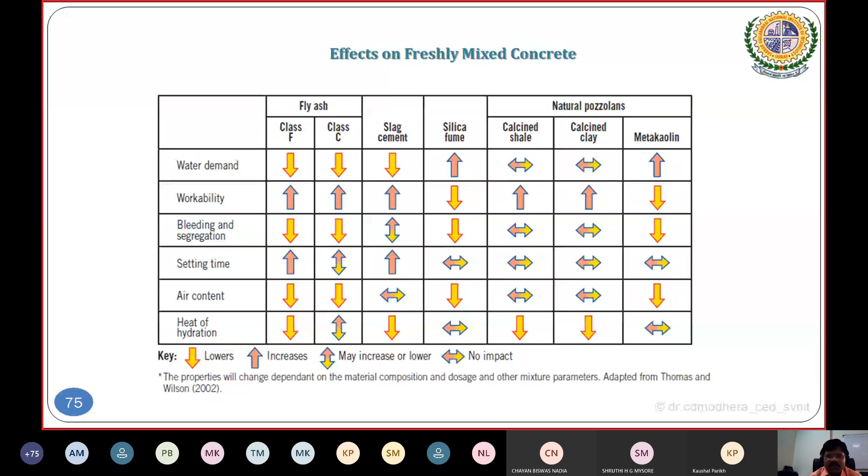That's why in our IS 10262, even we are working on 2019. It was published very initially in 1982, same number 10262. Then it was revised in 2009, and now 2019. Everywhere the title says it is a guideline - mix proportioning guideline. It is a guideline; reality may not be the same.

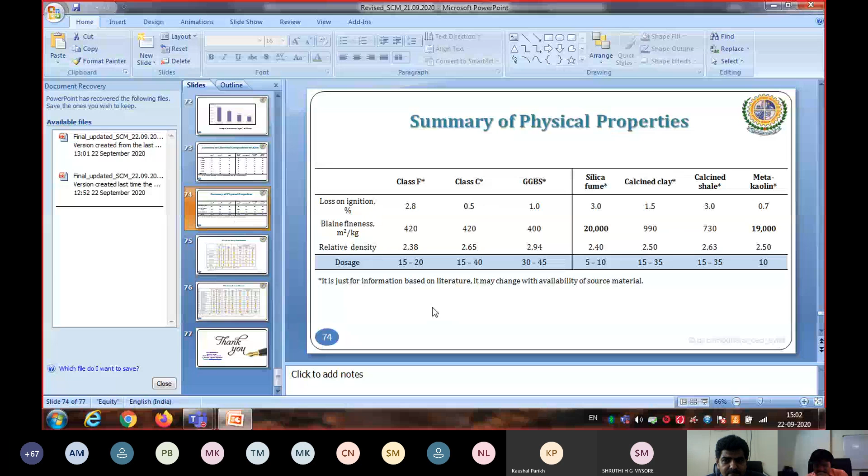5 to 7 only, and only trials. People have worked high volume trials, but I told that for that any other chemical admixture by default they have to use. If not using, then limit will not be more than 30%, 20 to 30, right?

Sir, there is one question. In slide number 71 you have written WGP. So what are the reasons for increase in strength with increase in the percentage of WGP?

That is true, very good question. Because initially we blindly used it, that time we did not see positive results. For your information, it reduced by 7 to 8% our original strength at 28 days, 20%.

So then it was again 3 or maybe 4 trials. After that, glass powder was again manufactured, grinding took place, and it became 90 micron something, and then those things we used, and it happened because then SiO2 reacted. It's a very fine material, and calcium oxide also available. So then reactivity came, but at a little later age, and we chose 20% as optimum.